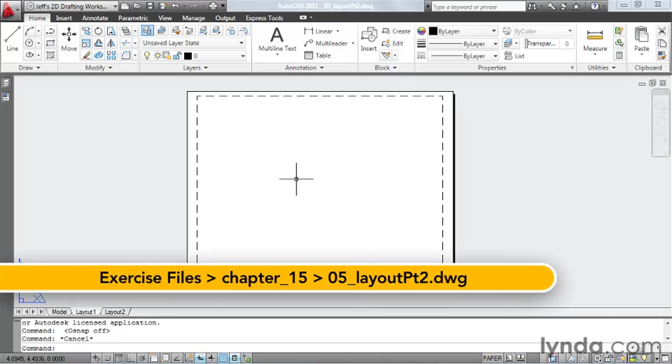Now that we've set up our layout and established a paper size, our next goal is to add the title block. Generally speaking, a layout acts just like model space, so if I wanted to, I could draft my title block right here on the Layout tab.

I could launch the rectangle command, pick a point here, and draw it to here. I could then press my spacebar to relaunch the command, turn on my running object snaps, start my rectangle at this endpoint, and draw it to here, slowly building my title block.

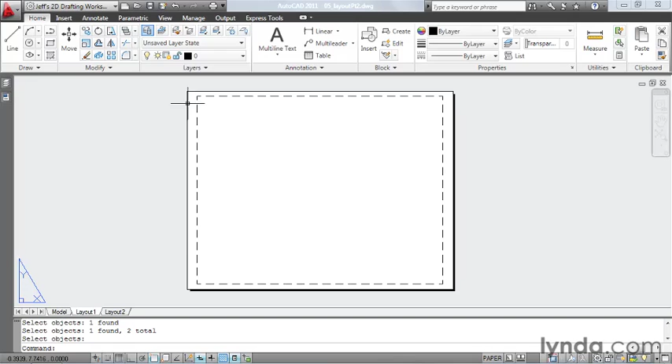Instead, in an effort to save time, I've already created a drawing that contains my title block geometry. Let's drag that geometry onto this layout. I'm going to erase these rectangles since I don't need them anymore. Then I'll launch the Open command, jump into the Chapter 15 folder inside our Exercise Files directory, select this title block drawing, and click Open.

Now that I have two drawings open in my interface, I'll click the View tab and come down and click the Tile Vertically button. This gives me a nice side-by-side view of my files.

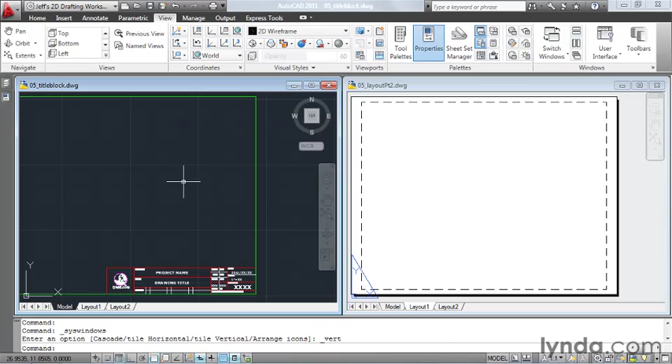Let's clean up these views a little. I'll start by zooming out and centering my title block geometry in this window, then click to put the focus in this window and pan this over to center my layout.

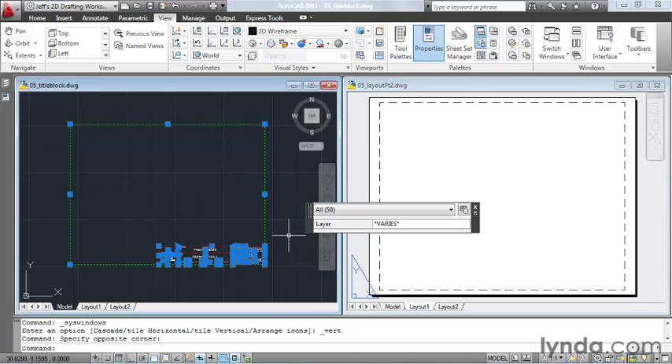To move this geometry onto my layout, I'll click to put the focus on the title block drawing, then select this geometry, click and hold on a highlighted portion of a line, and drag this into the other file.

Now I will visually center this as well as I can. I don't need my title block drawing anymore, so I'll close it and maximize the other drawing on screen. At this point, my title block looks centered fairly well. If necessary, I can always come back later and adjust its location after I make my first plot.

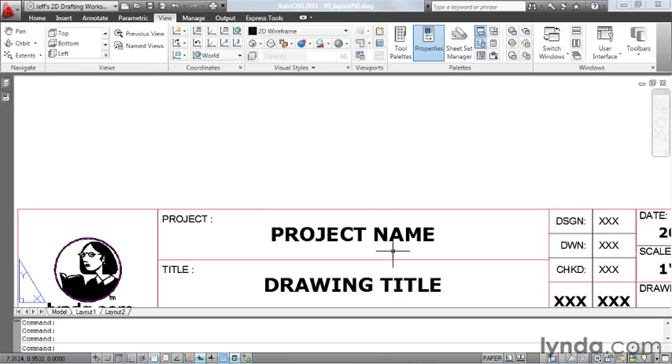Now that the title block's here, I can zoom in and edit the text to suit my needs. The drawing that I'm printing is a headlamp mounting plate.

In addition to title blocks, layouts are also a great place to put notes, legends, north arrows, and scale bars. In our next lesson, we'll complete our layout by adding a viewport and setting our geometry to a measurable scale.